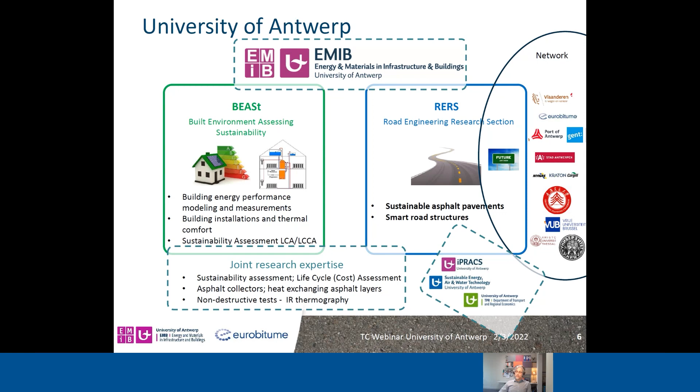I always start my first lecture for the students with stating that the road is of social and economic importance. Also my colleagues know that. Our society and its development level is highly supported by the quality and reliability of road infrastructure.

And it is our mission from our research group, also as an engineer, to support this innovation so we can challenge current and future challenges and maintain this level on a high level. Our responsibility is to step outside the idea that only recycling is sufficient. And this will be on 2 aspects.

What to do with the historical, still accumulating pavement assets, and secondly, making the right decisions right now, today, for the challenges in future, optimizing its future use. So currently, if you see the positive side, we have sufficient potential resources, as you know, like asphalt. But on a negative way, the decisions in the past were not done with a future view on reusing these assets. So we have some problems now.

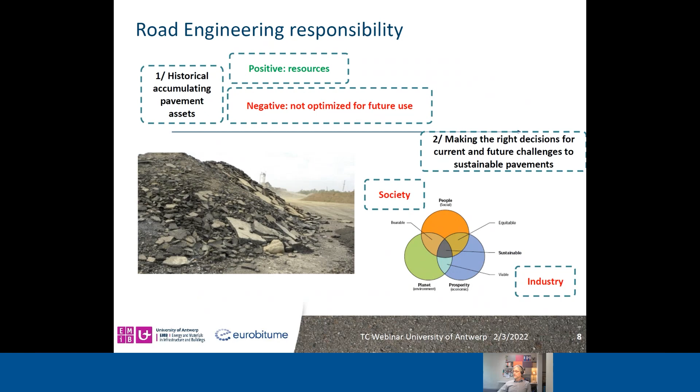So we have a double task as engineers in the next decades. Both society and industry expect better results and more answers from us, from our research group and our industry. So our strategic vision on sustainability is to go beyond current actions and methods such as carbon footprint, recycling, service life, biobinders, by detecting future challenges and what is needed to be ready for the future. So we want reliable and future-proof infrastructure with almost 0 environmental impact in the broad sense, also transport, for instance. So this way, we want to be a step before the problem occurs.

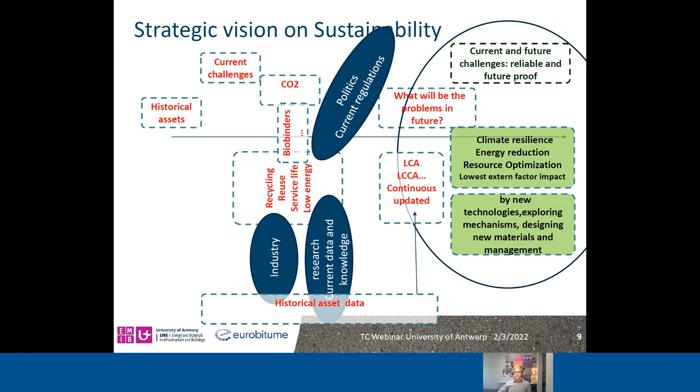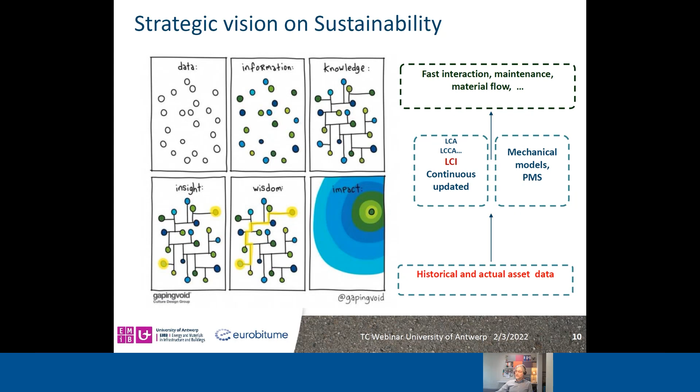Our research topics are therefore climate resilience, energy reduction, and resource optimization, using new technology and management, exploring mechanisms and designing new materials. One of these aspects is data, not just using it, but by means of knowledge, open source accessibility, it's important, I come back to that, insight and expertise, adding important impact on society and industry. So why not a continuously updated LCI, for instance? And indeed, if we want to solve future challenges, we need to go towards BIM, Building Information Modeling. In a publication, Shaping the Future of Construction, BIM is the most promising technology with highest impact.

So many of our research topics are part of 2 goals. The development of a smart pavement performance model, including climate change, traffic, aging, healing, fatigue, based on historical and actual data. And on the other hand, the development of a smart selection model for assigning the use of RAP. We have RAP, so let's use it smart. So we work more effectively by detecting and defining these future problems and the parameters, and use historical and current data to build these models.

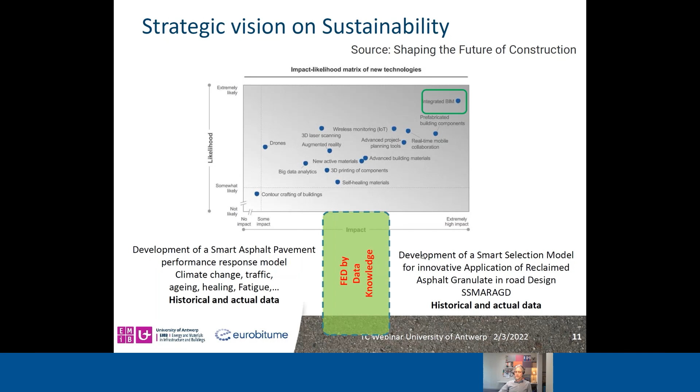These models will be fed by simulated data from macro level, the roads, traffic, even towards molecular level data from the microscope, for instance, or the rheology. Only that way will we understand the mechanisms and get future-proof solutions. We don't need to design asphalt for today, we need to design asphalt and materials that can resist climate change in future within decades.

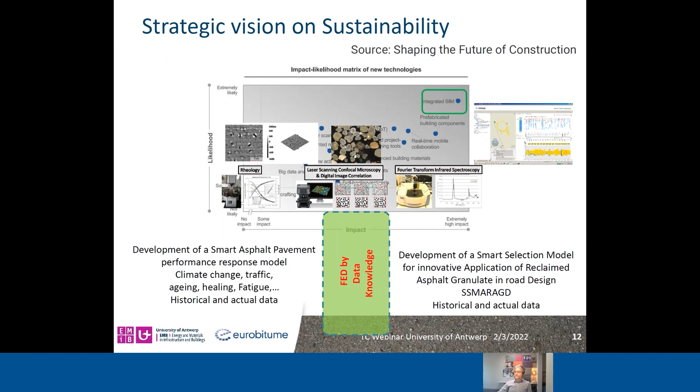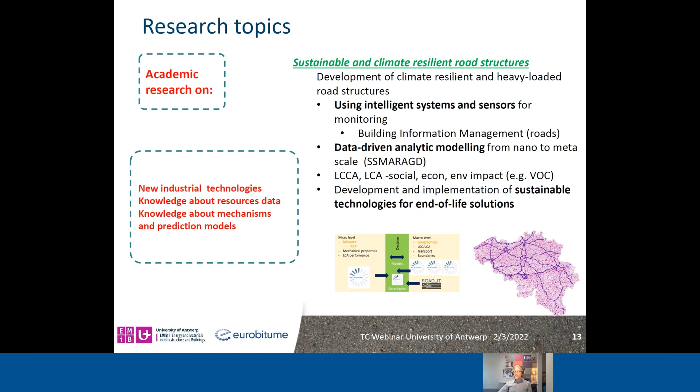Here you can see our main research topics to develop sustainable and climate resilient road structures by using intelligent systems and sensors for monitoring, data-driven analytic modeling from nano to meta scale, LCA, LCCA assessment, development and implementation of sustainable technologies for end-of-life solutions.

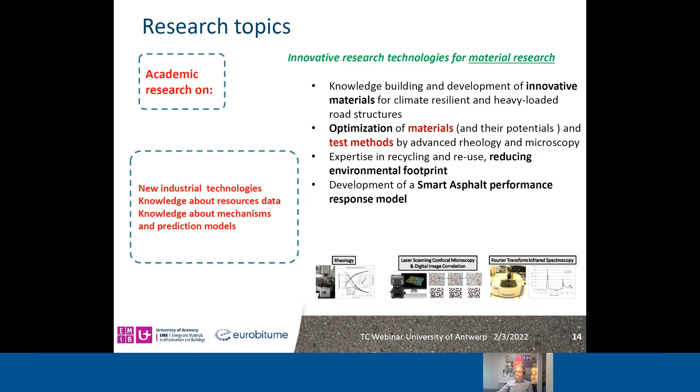The second research line is material research and optimizing test methods in order to anticipate the upcoming climate change implications. This research is done on nano, we come back to that later too with the two presentations, and macro scale, and uses innovative rheology and materials, such as biobinders, rejuvenators, titanium dioxide. Further, we want to reduce their environmental impact and footprint and use all these data in the development of the smart asphalt performance response model.

Now, in order to support both these research lines, I already discussed these topics, we can count on 25 junior and senior members, and some of them are attending this meeting. And we have also a well-equipped asphalt laboratory with most general and some specific test devices. And also, we are proud of this, an extensive bitumen lab consisting of physical, chemical, and rheology test devices and microscopes, giving a physical view on the material on a very small scale.

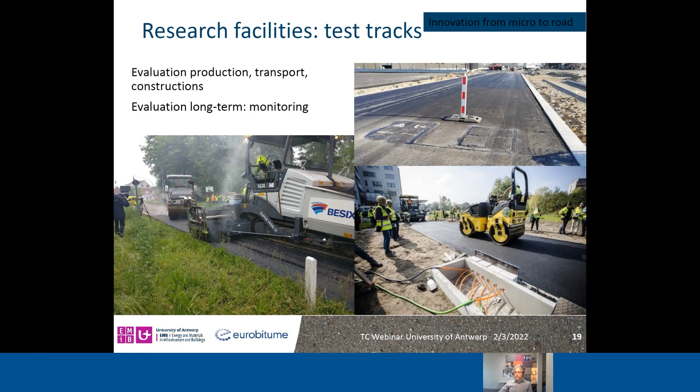Last but not least, maybe this is also the strength of our research group, we manage several test tracks in order to monitor our research on a larger scale, but even more important, on a longer term and under real conditions. So if you need more information, you can check our website and attend our yearly organized Asphalt Innovation Symposium every year in December in Antwerp.

So I hope that I convinced you that we have ambitious strategies with excellent resources, so we are the ideal partner for you in future research. I want to thank you. I also added a list of our current PhD projects, students, and other current projects ongoing with industry in this presentation. We will send it later to you.

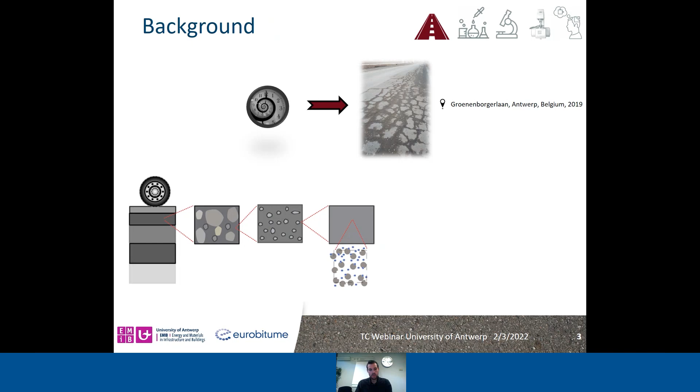This phenomenon of aging is quite complicated to investigate, since it's a multi-phase and multi-physics phenomenon that we can study from different perspectives and scales, starting from on-site and going down to macro, meso and also binder scale, and this can be distinguished either to nanoscale or even molecular scale. Of course, the phenomenological performance of bitumen, in other words the mechanical and rheological performance, is also important to see how this behaves at the upper levels.

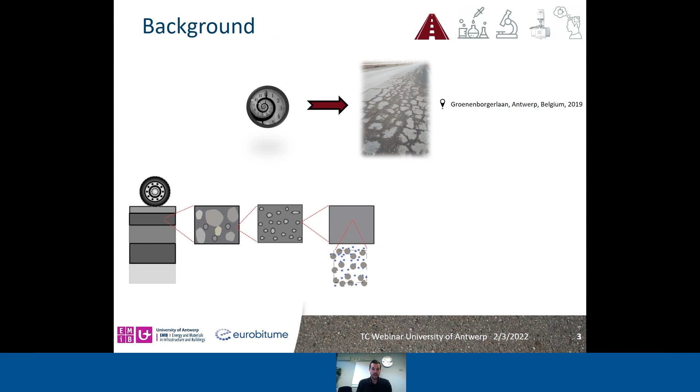Fortunately, at the University of Antwerp, we have a well-equipped lab where we can perform different physico-chemical analyses and also rheomechanical analyses in bitumen and asphalt. But my PhD research is focusing only on the binding medium, in this case our good friend bitumen. And I'm focusing mainly on two scales, the microstructure and rheological performance, and the chemistry of bitumen that we study via molecular investigations.

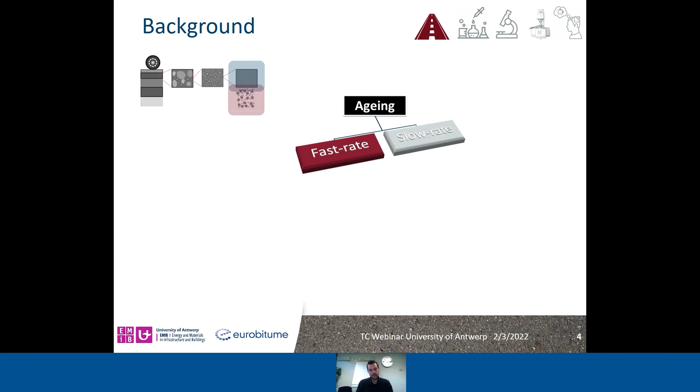Having this in mind, I will briefly mention the hypothesis that exists until nowadays for the molecular scale of bitumen with regard to aging. Previous scholars have reported that aging can be split in two rate-determining phases in terms of chemical reactions, one fast and one slow rate phase. And they have proposed also different chemical paths. For example, one of the most popular ones is that

from around 10 years ago, which proposes that a model compound of bitumen, in this case dihydroanthracene, can react with oxygen, and after some intermediate products like hydroperoxide, can either decompose to organic free radicals or be aromatized, accompanied also by the formation of sulfoxides. This refers to the fast rate reaction, and free radicals were considered to play an important role in the continuation of the second phase, which is the slow rate-determining phase.

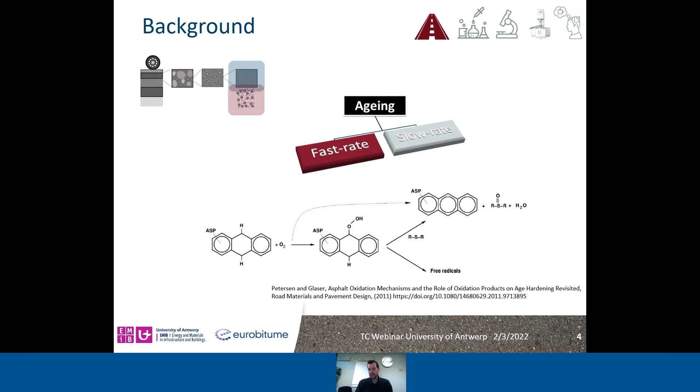However, these are hypotheses that have not been proved to much extent, apart from sulfoxide and carbonyl formation that has been observed with Fourier transform infrared spectrometer. Why are we now considering understanding chemistry? Of course, it's obvious that chemistry is the more fundamental way to understand changes in rheology.

For example, on the left you can see how aging affects the rheological master curves, and there are obvious changes with aging, with standardized simulations like rolling thin film oven testing and pressurized aging vessel: they increase the complex modulus and they decrease the phase angle. These are known changes because of aging in rheology, but there are also other effects of aging, extracted from master curves, rheological parameters, but also in different chemical variables, for example, changes in solubility or polarity-based fractions of bitumen, widely known as SARA fractions.

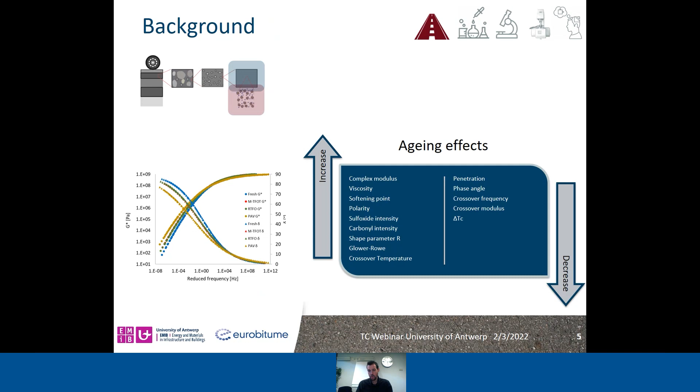I will not go into each one of them in detail, but what I would like to highlight is that chemistry is probably the key to understand phenomenological changes like rheological and mechanical ones. The objectives of my PhD involve, among others, an experimental validation for this aging mechanism about the chemistry, not only with isotherm conditions, but also what is the effect of standard simulations that we use in the lab, like RTFO and PAV, how these are affecting the chemical paths and the oxidation products.

I would also like to give you a taste of what link we can find until now between chemistry and the apparent bitumen surface microstructure. And finally, one of the goals of this PhD work is to provide a statistical framework in order to link the chemistry and rheological changes because of aging, and finally to model them, which I will not go through in today's presentation, via a continuum thermodynamics approach, or more specifically with thermodynamics of irreversible processes, which fit pretty well to an irreversible process like aging.

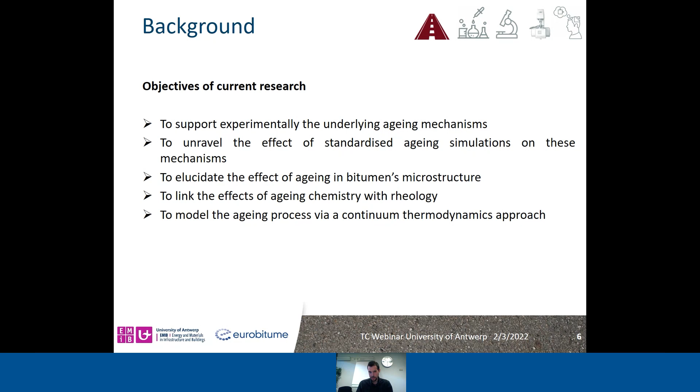I will jump now to the first core part of my presentation, which is the experimental proof of the aging mechanism that we have provided to some extent. For that reason, we have used three different binders that vary considerably from each other, not only in terms of empirical performance, penetration and softening point, but also in terms of crude source and distillation process. Binder C, more specifically from this table, is a product of a visbreaking process, and also included waxes. So we tried to vary the binders as much as possible, so that we can conclude if the mechanisms are more or less universal or not.

For that reason, we used a kind of modified aging simulation, thin film oven testing, but at a different temperature, 50 degrees, in order to accelerate the process a little bit from realistic conditions. Different time intervals from 0 to 2 months were used with different spectroscopic techniques, which I will go into in detail in the next slides, with the goal to capture intermediate and final products of the hypotheses that existed until nowadays, and to review if these hypotheses and the aging mechanisms are valid or not.

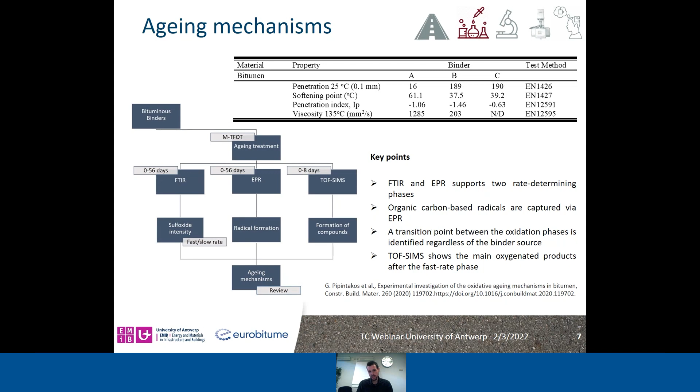The first technique, which is the most common one for research purposes and is used widely, is the Fourier transform infrared spectrometer, or FTIR. On the left, you can see spectra and how they evolved over time. On the right, we have isolated the normalized sulfoxide intensity, which is considered one of the products of the fast rate phase. We can see from these oxidation kinetics that all the binders fit a model that takes into account the fast and the slow product; the fitting curve is based on this model, and the parameters were extracted from this model.

And this supports indeed that from FTIR we can separate the fast and the slow rate phase. However, as I mentioned in the beginning, it is believed that from the fast rate phase there is a different chemical path that also creates radicals, organic radicals.

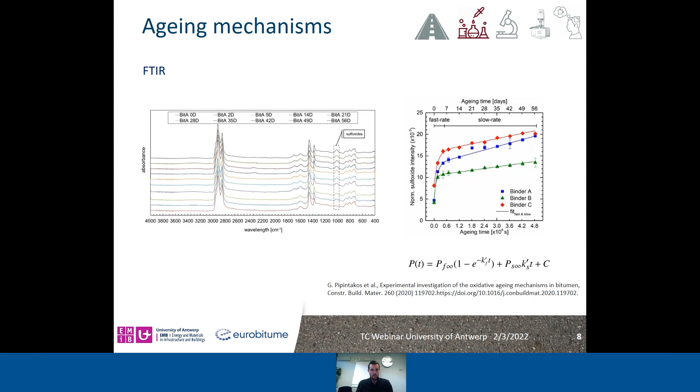And the interpretation of this for the organic carbon-centered radicals is based on the fact that oxygen-centered radicals, which according to previous hypotheses for the chemical paths are produced, yield carbon-centered radicals during the fast rate phase, and afterwards during the slow rate phase, the rate of production and formation most probably is equal, and for that reason we observe a plateau in all the binders, independent of the binder type, source or distillation.

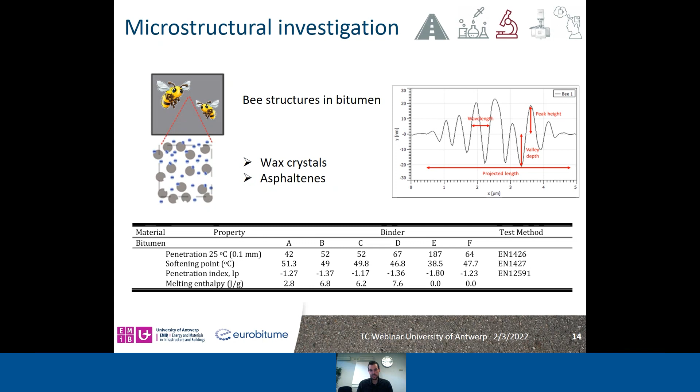It should be noted that binders E and F, which were wax-free, didn't show any features in the surface microstructure before or after aging. So the focus was only on the waxy binders, and for that reason we investigated waxy binders before and after standardized aging simulations of RTFO and PAV.

Some obvious observations before and after standardized simulation in the lab is that the number of bees is decreasing, for example, and this is confirmed from both microscopies. And with AFM, with phase contrast, we can also observe a second phase of these bee structures, which is called the periphase, which is not really obvious with the confocal laser scanning microscopy.

After these, let's say, human-based observations, more sophisticated image editing software packages were used that accompany these two microscopies. And we were able to isolate the bees based on height thresholds that were imposed for the peaks and valleys. And we extracted for the waxy binders before and after aging different metrics of identification of the bees, like the bee percentage and the number of bees, which are normalized per square micrometer.

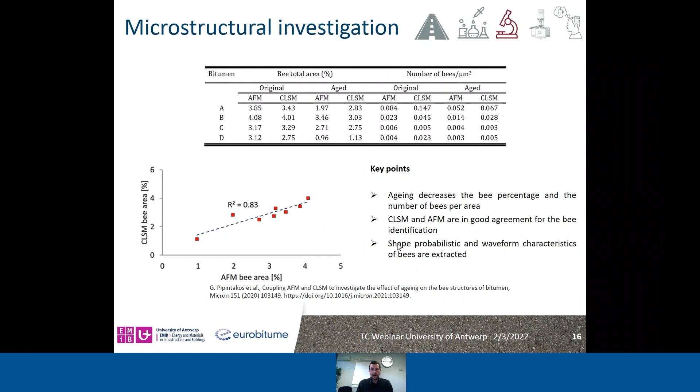In the third core part of my presentation, since I would like just to give you a taste of all of them, if you are interested, you can always find information on the corresponding publications at the bottom of the slides. This is our latest study that takes into account a statistical framework in order to link chemistry and rheology.

For that reason, the same three binders that I presented in the first study for the experimental proof of the aging mechanisms were used, which varied considerably in terms of distillation, source and type. They were used in 4 different aging states: standardized ones, RTFO and PAV, and also the original unaged binder. And also from the first study, the time interval at 8 days was used for all the binders with this modified thin film oven testing, since it was considered the completion of the fast rate phase and the initiation of the slow rate phase.

Then different methods were used, spectroscopic techniques that showed great potential, but also proton nuclear magnetic resonance, which can give us information about the proton regions. And also rheological testing, typical frequency sweeps with a dynamic shear rheometer and viscosity tests that were performed with cup and bob. And after constructing master curves, different rheological parameters, indicators, which are not standardized ones, but are more meaningful in terms of distress types according to literature, were used. I will go through them in short in a next slide.

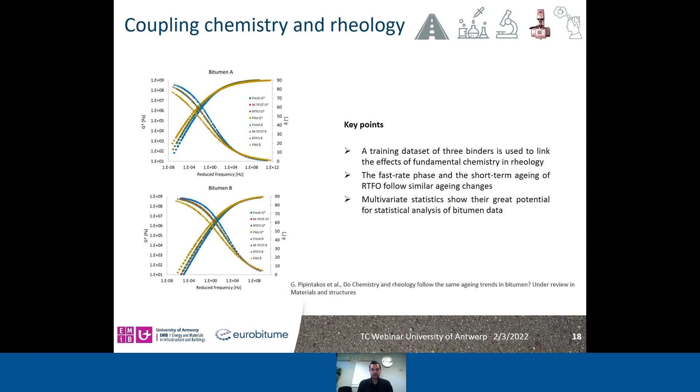All these values are extracted after you construct master curves, and so you need a variety of different temperatures in frequency sweeps in order to construct the master curves, and also low temperature should be taken into account in order to extract the delta Tc value, from different geometry of parallel plates in DSR of 4, 8, and 25 millimeters.

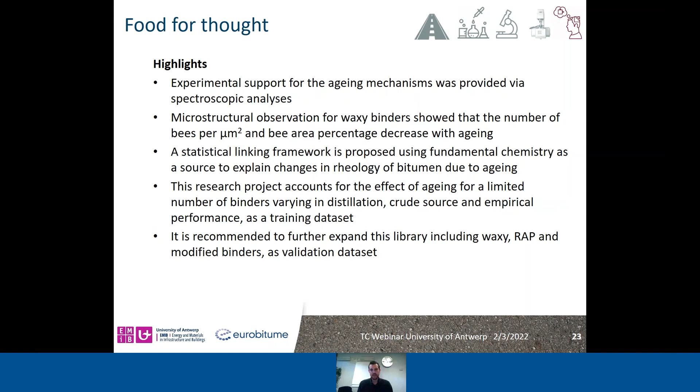In the future, we are targeting to expand this library, including more virgin binders, also extracted from sites where we have information for the binder itself, and also modified binders, which will be used as a validation data set for our statistical analysis.

Of course, if you are interested in this study or see some potential from your side, we would be glad to collaborate with you in different aspects. To name some of them, as I mentioned, there are open calls for different projects that we are running.

The first one is about the quantification of real-time kinetics of bitumen's microstructure. For this, 5 different research groups from 4 universities cooperate, and there is national funding for that.

We are now in search of more virgin binders so that we can investigate the cooling and heating effect on the real-time kinetics of these bee structures, and link them with other information, for example about crystals, so crystallography and differential scanning calorimetry of the virgins.

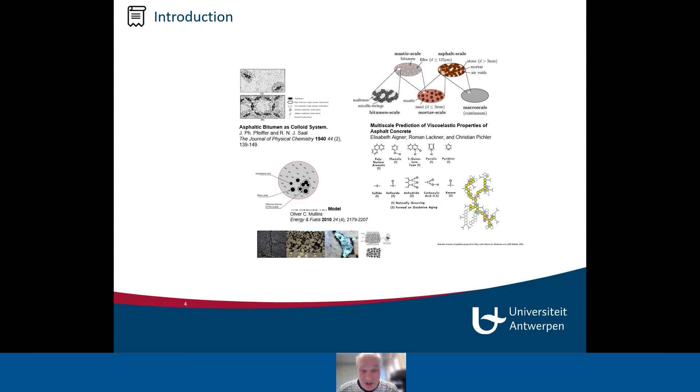The objective or research question was: can we generate bee structures? Can we make them ourselves? The idea was, if we take straight saturated hydrocarbons of a certain length, so waxes, and put them in bitumen, can we then get some bee structures at the surface of the bitumen?

So we set up a plan, and we worked with two setups. We used atomic force measurement equipment, which we could use from the Vrije Universiteit Brussel. Then we used our confocal laser scanning microscope as an additional tool. So we had two techniques, and we started with paraffinic bitumen because we knew there were some bees on the surface there.

We could observe them, and we also knew that if we have wax-free bitumen, we don't see any bee structures on the surface. By adding these waxes, we could generate these wrinkling effects, and this occurs in these bees, and we could observe them both in AFM and in confocal microscopy.

We also wanted to see if it was possible to make bees in oil, or in maltenes, or on covered surfaces. So what we did was cover half of the surface with glass, and the other half was open to the air, so it was a free surface. We could clearly see that the effect of covering influences the generation or propagation of these bees.

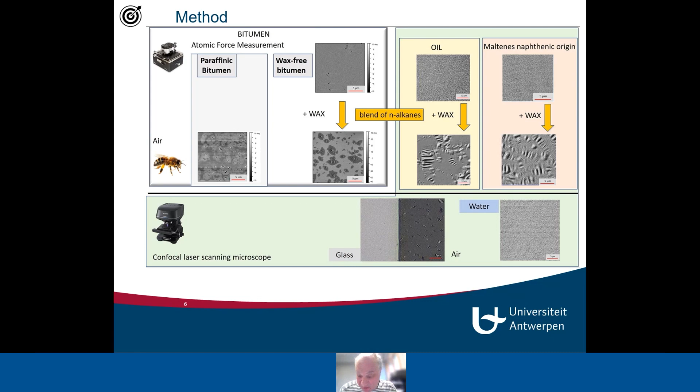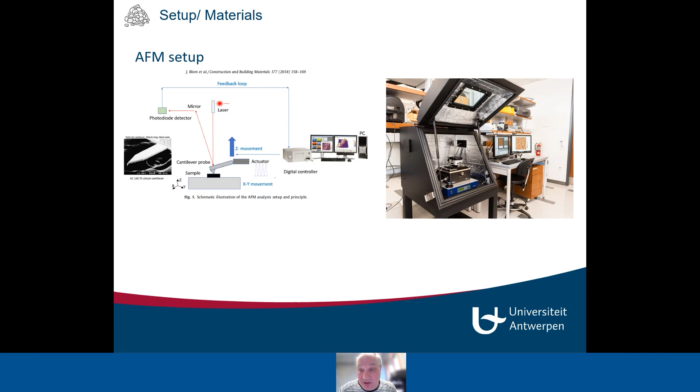You want to have very accurate images. It means that you want to go over the surface as close as possible, and if you have large bees which you didn't suspect, then you can have a collision with your sample. So it could be very tricky, and also bitumen can be very soft, and then of course the needle can be contaminated, leading to disastrous measurements.

Our confocal microscope contains two techniques. There is an optical confocal microscope in it, and there is a laser. So we can use both techniques in this machine. We can have an optimal confocal optical image, we can go up to almost 24,000 times magnification, and we can make a 3D scan of the specimen with a laser. So that's a very advanced machine.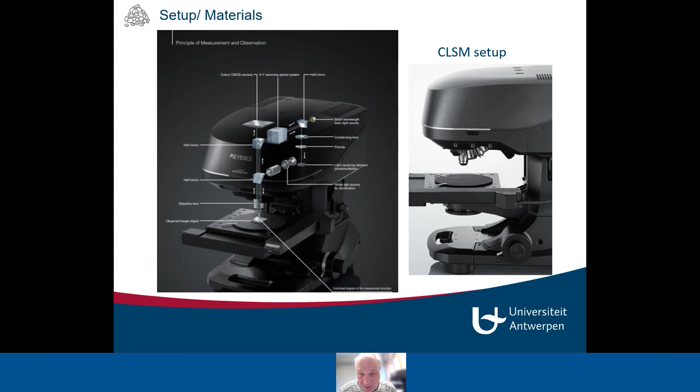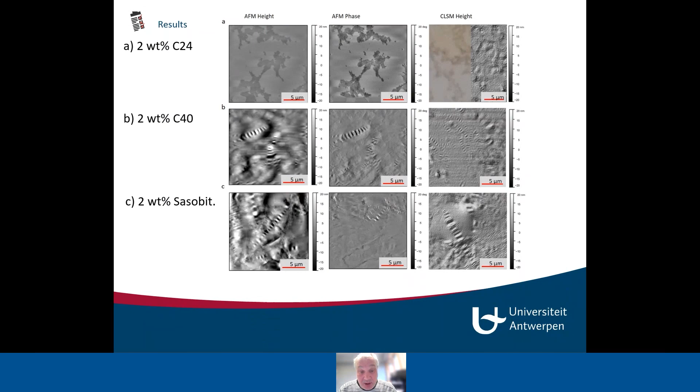If we increase the chain length of the waxes and go to a C40, then at that moment we can see that we start to generate these bees, and we can see this in the AFM and in the confocal images. Also, if we take a commercial wax like Sasobit, if we add 2%, then you can clearly see again the creation of these bees.

So we started then not only with one wax component, but to see if we combine short and long waxes together, and then we finally found some wax mixtures which delivered some nice bee populations. So here you can see that we started adding C24s and C40s together in different weight ratios, and then we could obtain these nice bee structures. So clearly, if we add wax to a virgin bitumen, we can generate these bee structures, and that is dependent on the amount of wax and on the combination of different C chain lengths.

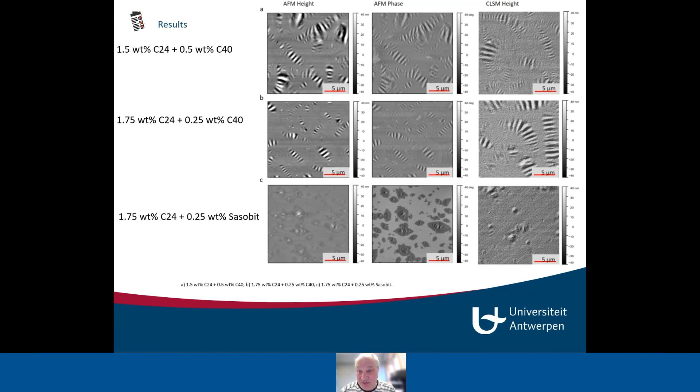We also did it with a combination of a C24 and Sasobit, and then you see that the bees become more like little drops, so we can see changes in the morphology of the bees. Here you see some drawbacks of the AFM. As I told you, I made an image of a needle which was contaminated, and you can also see in the sample afterwards, in an image I made with the confocal laser, that you have these scratches.

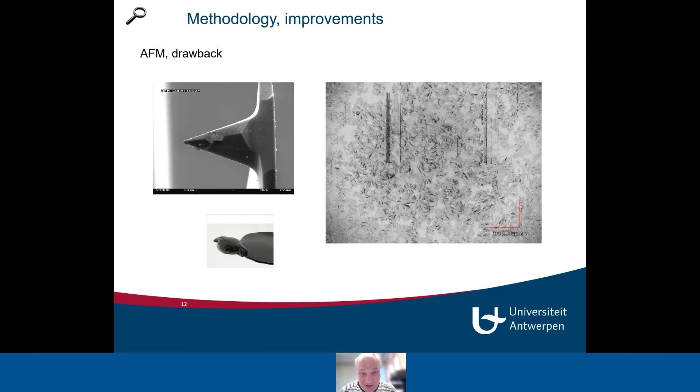So with a very soft bitumen, or if you could not really adjust the height in a proper way, you could have contaminations with them. And of course, it's impossible with an AFM to measure on fluids or through glass. You can only scan a surface, but with a laser confocal microscope, you can measure through glass. So you have the possibility to measure through a transparent medium. So you can measure through oil, water, or glass.

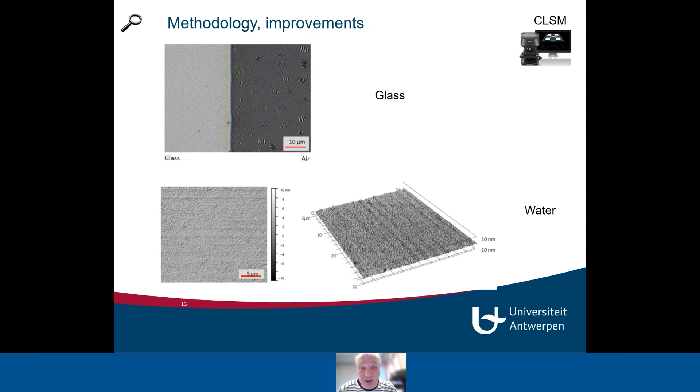And what you can see here, if you cover it, the one side is covered with glass, so you don't have a free surface. When you don't have a free surface, there will be no bee structures. So you clearly need a free surface in order to generate this wrinkling effect. If we put it underwater and we measure it, we can see the same. You see no origin of bees. So again, a free surface is essential in the propagation or the development of the bees.

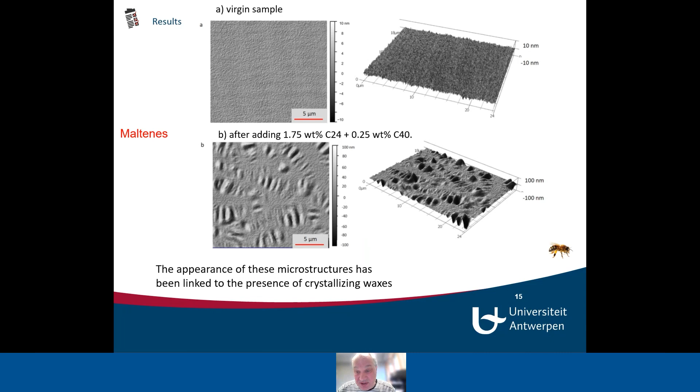Then we also took some maltenes. If we look at maltenes, we can see no bees, but if we add a wax cocktail to them, we can also generate these microstructures. So we see the crystallization and we see the bee structures occurring at the surface.

Then we had some shortcomings, of course, with the confocal laser microscope. One of the shortcomings is that, of course, an AFM is more sensitive, and that played a role in the measuring of these secondary phases. But if we combine optical and laser, we still could see the effect. So the lowest scale or the resolution of the laser is around 5 nanometer, and if you look at the profiles or the height differences, you can see that of course phenomena lower than 5 nanometer we cannot observe.

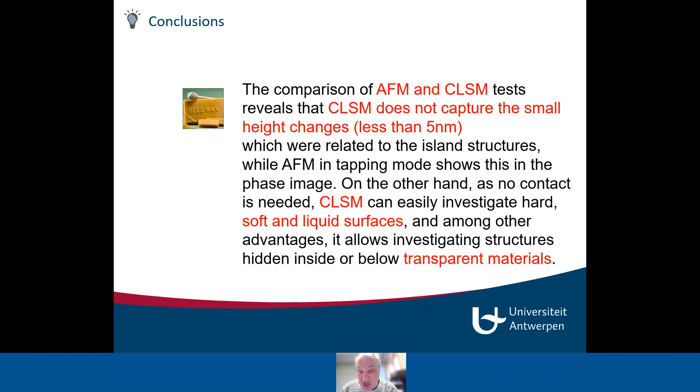So to finalize, we can see that these methods give more or less the same results. We can use them both. AFM is a little bit more sensitive, but has drawbacks that it can lead to contact and contamination. The confocal laser microscope is very handy and very fast. And then, of course, we can work on very soft, even liquids. We can look through surfaces. One of the things we are working on now are emulsions, for instance. So we can also continuously look at changes in the microstructure.

You see that unmodified bitumen, or bitumen without wax, is not showing any microstructure. For us, it's very clear that these microstructures, these bee structures, are formed by a combination of different n-alkanes. So different chain lengths will result in these bee structures, and we can correlate certain chain lengths and certain combinations to certain morphologies and certain distributions of bees.

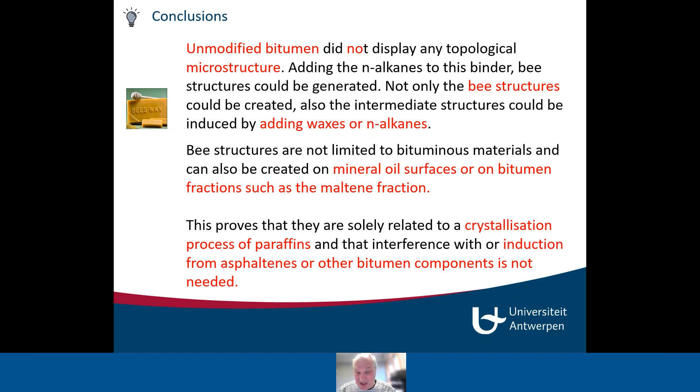And then we also see that we can also generate bees in oil or in paraffinic media. So there is no interference of asphaltenes or other bitumen components needed. So it's clearly due to the crystallization of the paraffins. We already published some things. There was a very nice publication in Fuel, and we also did some other publications.

I'm the promoter of that research network, so we are still looking for collaboration with the sector. And of course, one of the other things I'm working on is I'm also leading the RILEM group on fume emissions, and that's also something I want to work on in the future.

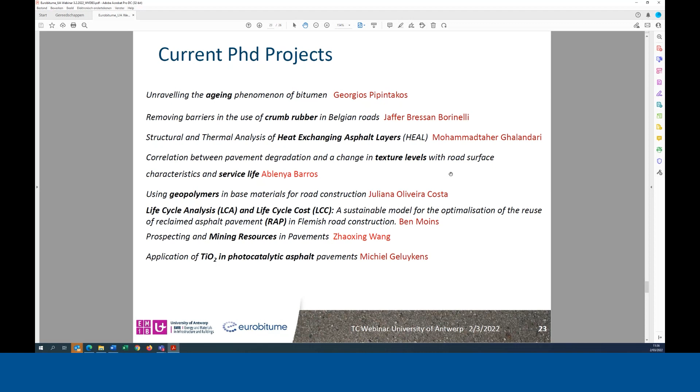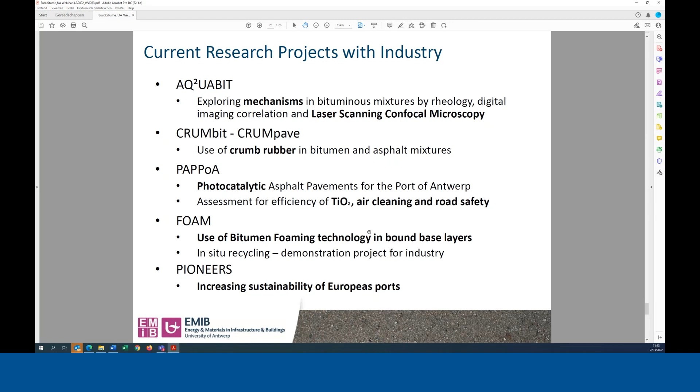And then the Pioneers, that's a new project. It's really a large project together with 3 ports in Europe, where we have different sub-projects in order to increase the sustainability. But it's not only on the pavement, it is also in other aspects. But we are in charge of the pavement and also the green public procurement part to increase the sustainability of these European ports. And this one, it's upcoming.

It started this year. We are monitoring all of our former test tracks now in collaboration with the Road Agency and the Belgian Road Research Center and several contractors, so that we can learn from the materials we used 10, 15 years ago, but also our newest one from the REjuveBIT project, so that if we drill cores, for instance, and we analyze the bitumen, then we can relate it with our laboratory aged material, and see if we find some correlation.

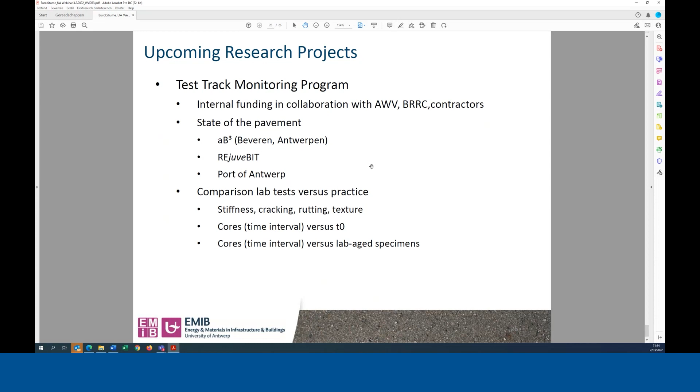So this is also together with the Port of Antwerp and the City of Antwerp and the City of Beveren, where we used the aB³. It's aged bitumen bound base material, where we used old waterproofing waste material in combination with RAP and 1% of bitumen. And these test tracks still exist, so it's a very good material. Okay, so these are some of our projects now ongoing.

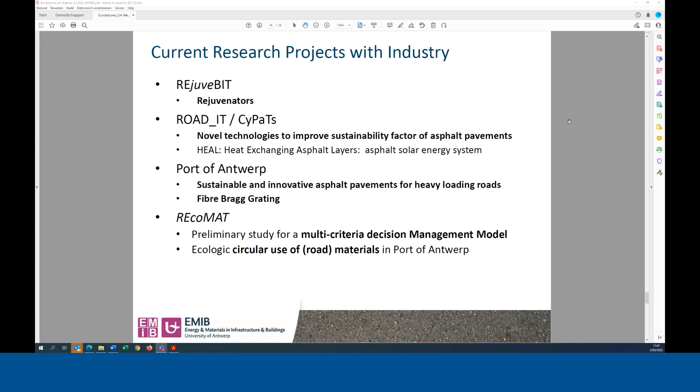Yeah. Thank you very much. Maybe we have some more time for questions to Georgios and Johan. Do you have any more questions for them? So shall we start with questions to Georgios then? Mm-hmm. Maybe you have one. Don't be shy. Yes.

Do you think our laboratory methods for aging really represent more or less the future performance of the binders, or do you think we need to start considering alternative methods other than the ones you already mentioned in your presentation? Yeah, that's really a nice question, and there is a lot of discussion, at least in the scientific community, about that. From my perspective, I see different reasons that are either pro or con for the standard aging simulations, for example, RTFO and PAV.

But I also see that comparison with real conditions misses some points, especially if one goes to the chemistry of bitumen. For sure, there are different chemical alterations that take place in reality. For example, we have tested some extracted binders, and they show a different chemical pattern compared to severe aging with PAV and non-standard ones, for example, 40 or 60 hours PAV, and they show some differences in terms of chemical products. However, I'm also a supporter that chemistry plays a role in the rheology of bitumen.